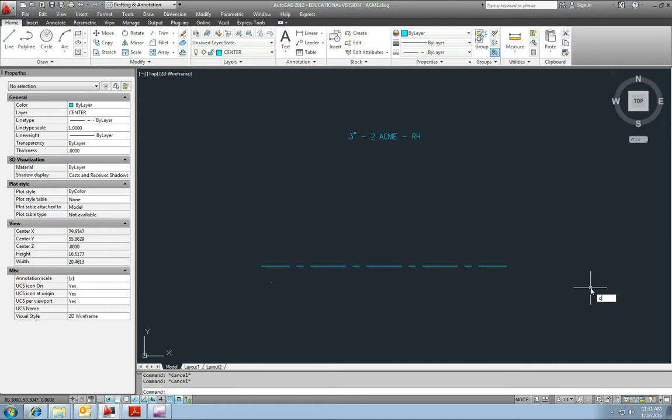The major outside diameter of this thread is 3 inches, so I want to offset that line by 1.5 inches each direction. Let me move this a little closer to the thread note. Okay, the pitch is 1/2.

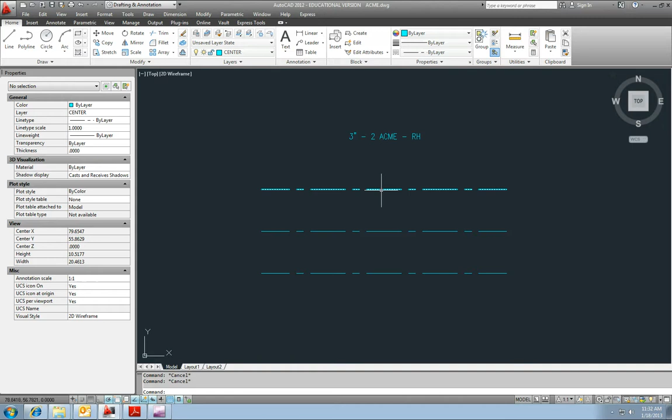Our thread length is a little over 4 1/4 inches. This is a little bit different than the other threads, and we may make a couple of changes as we go along, but just for now, let's offset that line by 2 1/4 in each direction. Actually, let's do 2.5 because we may need a little extra in each direction, and we can trim it to get the approximate dimensions shown in the handout. It'll be easier to subtract than add.

So let's go ahead and change these to the visible line type. Then I want to do some offsets using this top line here and the bottom line. I guess I can go ahead and trim off the ends like we've done in the past and erase the line in the middle there.

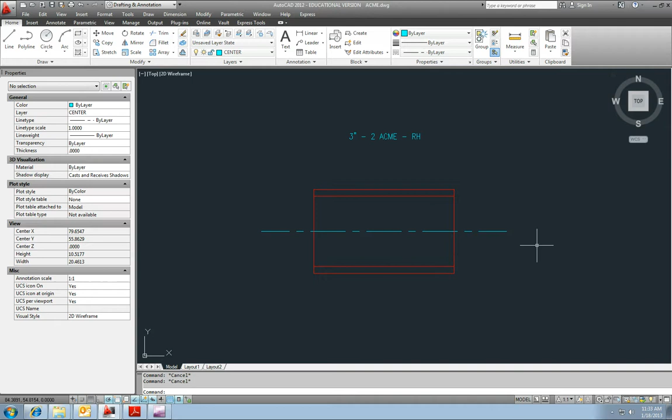Okay, so we want to make an offset by p/2. If our pitch is 1/2, then half of that would be 1/4, so let's offset by 1/4. And go in that direction, and then we want to offset by p/4. If our pitch is 1/2, then 1/4 of that would be 1/8. So O, enter, 1 divided by 8, enter.

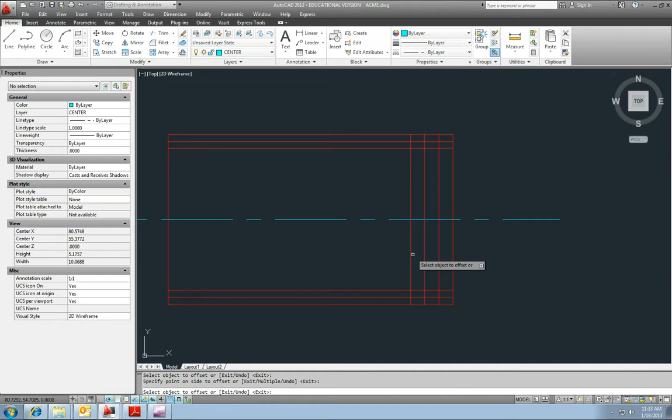Now what I want to do is offset this line on the right, this vertical line on the right, by p/2, and I will offset that to the left, and I'm actually going to draw several offsets. I'm not sure how many I'll need at this point. O, enter, 1/4, enter. And we'll do one more. I'm just not sure how many we'll need at this point.

Okay, so we're going to array, as you've probably already figured out. It says that we need to draw a 15-degree angled line that passes through alternating intersection points. So for example, here, here, here, and here.

So let's just start off, and I will start at this line. Make sure that you have some kind of polar tracking increment that fits into 15 degrees, so that will work. Okay, 90 minus 15 is 75, that's why we see the 75 on the arc there. So I'll left click because I see my green polar tracking line, and then let me extend that line to here.

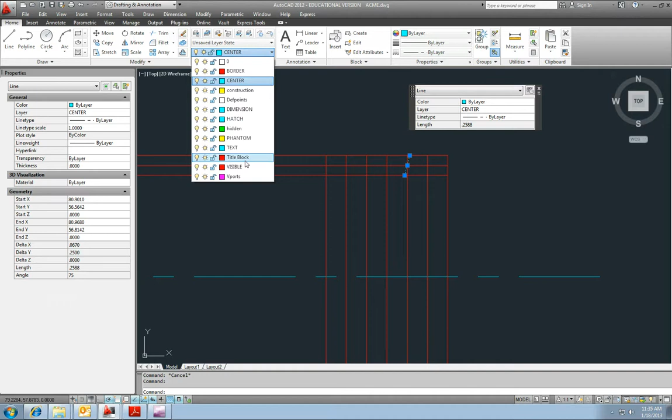And then I will trim off that. Okay, let me put this on the correct line type or layer and make my current layer visible. Okay, and we need to add another one going the opposite direction.

I'm not going to follow the book exactly. So I'll do that through this intersection point, and this one will be going in this direction, again 15 degrees from the vertical, just leaning the other way. So L, enter, and let me - so 90 plus 15 is 105.

I see my green polar tracking, so I'll left click, let me extend, and then I will trim off what is left.

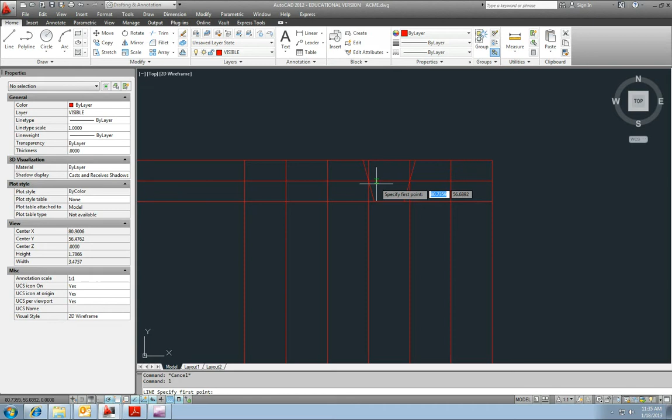Now I will draw a line from this endpoint to that endpoint. Notice I'm not going all the way to the intersection. And then I want to copy this line to here, because I need that length.

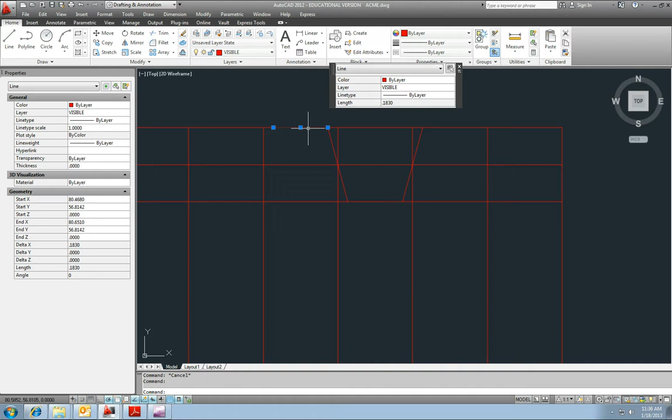Now I didn't actually calculate that length. It's 0.183, which really doesn't mean anything to me. But I want to copy that same length to here, because on the ACME thread, the width of the crest is the same as the width of the root.

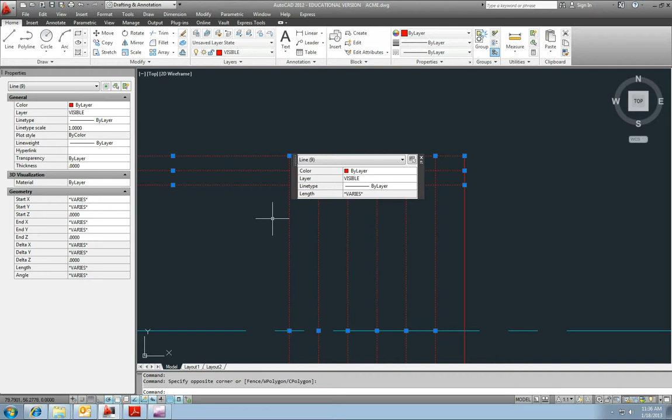So what I've done is let me erase - I think I want to erase most of these lines I drew. I just don't think I'm going to use them. But I've done one complete - I'm not sure what to call it - from crest to back to crest.

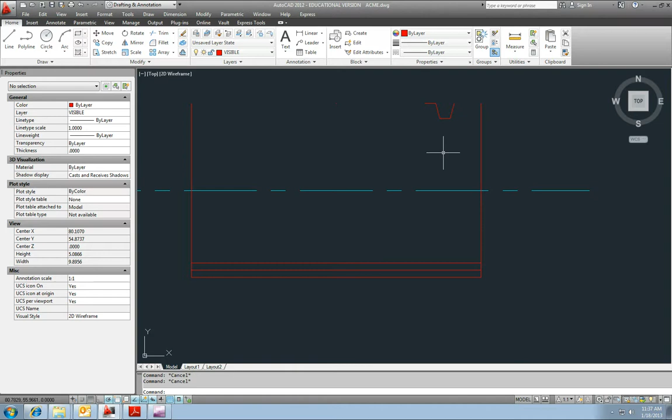I'll go from the left side of the crest down to the root and back up to my starting point on my crest. And I can take that same segment that I created there and drop it down to the bottom. Now this is a single ACME thread, so the crest is opposite a root for a single thread.

So if I just take that and I copy it straight down - notice I have my perpendicular snap on - when I copy it straight down, then a crest is over a root, because up here on the top this is a root, but directly below it that's going to be a crest.

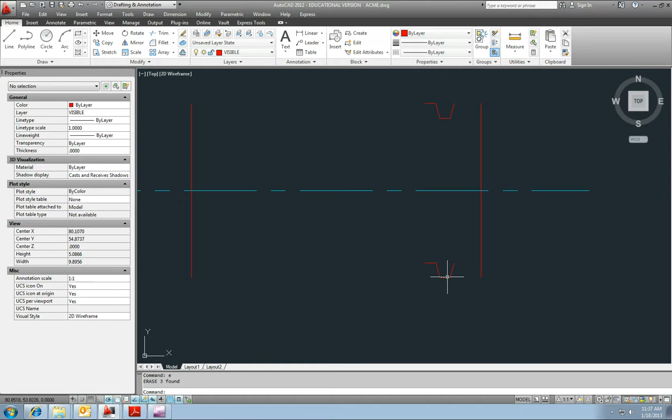Alright, so now that I've done that, let me array, AR, enter, and let me select those objects, enter, rectangular, and I want to go this direction, so let me just click on the endpoint down there and enter to accept spacing.

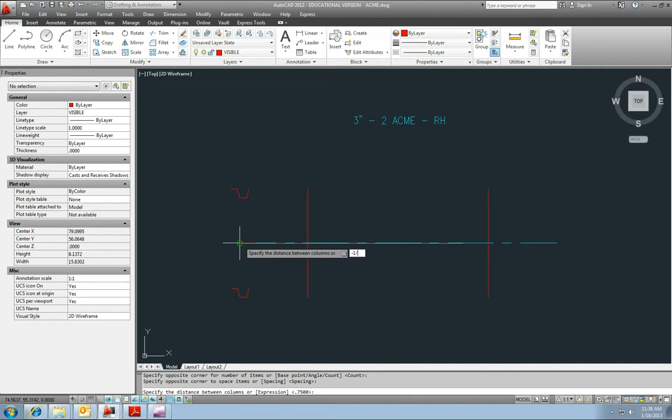Now the distance between columns - I actually should have measured it, but I believe it should be P. Our P is 1/2, so let me put in negative 1 divided by 2, enter. Now you can see how all those segments are end to end, just as they should be.

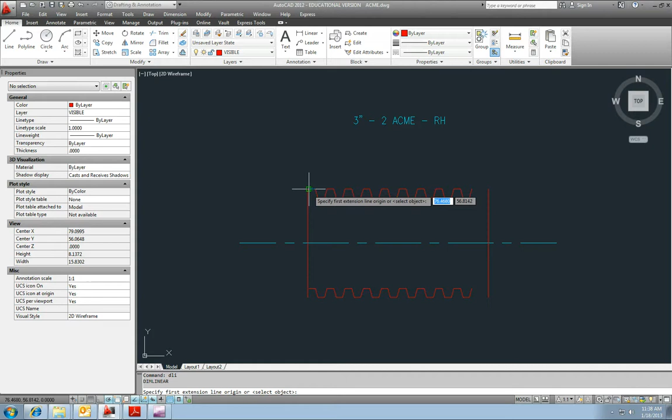I'm not going to worry a whole lot about the length right now, but let me just do a check to see where we are on length. So I just did DLI for dim linear. Right now we're at 4.5, and the dimensions on the handout are 4.2835. So we're probably good there.

So now what we need to do - I don't think I'll explode that yet. I'll probably go right back and explode it, but right now I'm just going to leave it as it is. We need to draw lines from crest to crest - from that point to that point, from that point to that point, and then from root to root.

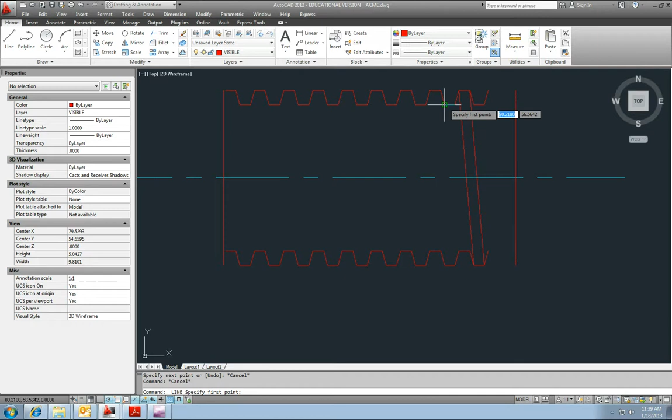Make sure you're snapping on the endpoints there. And let me take these - well, I'll just wait on that. So let me array that across.

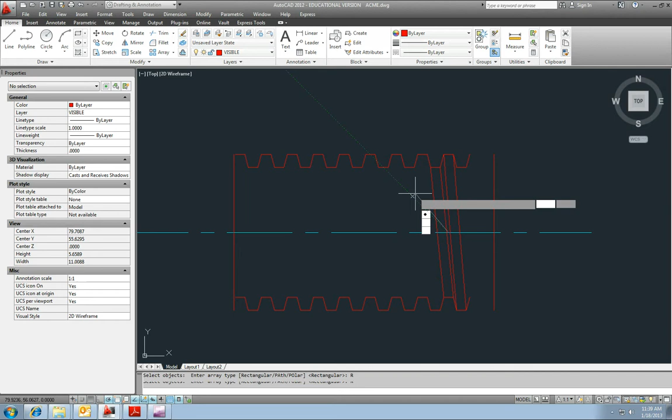AR, enter. I'll select those lines, enter. Rectangular. I'll go in this direction. Enter to accept spacing change. Alright, and now I need to define negative 1/2 as my distance. Enter.

Okay, and I don't have enough of them, so let me go into my array edit and let me try to find something that matches what I have already there. That's maybe a little too much.